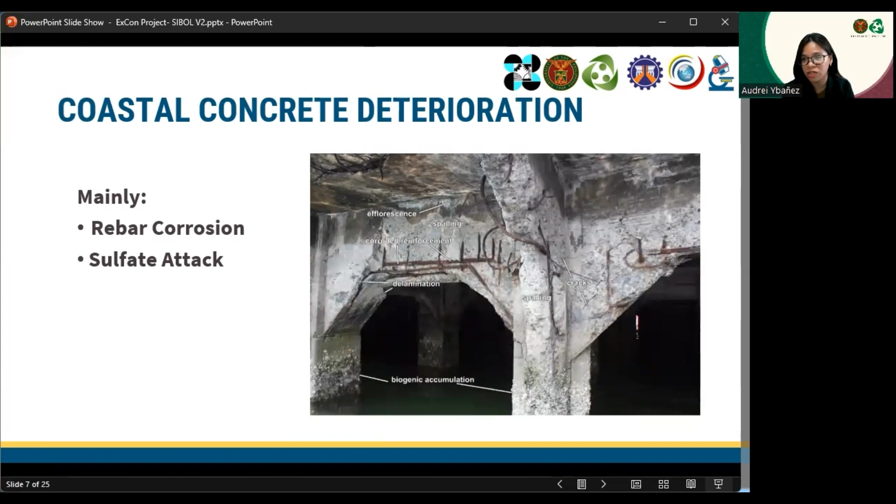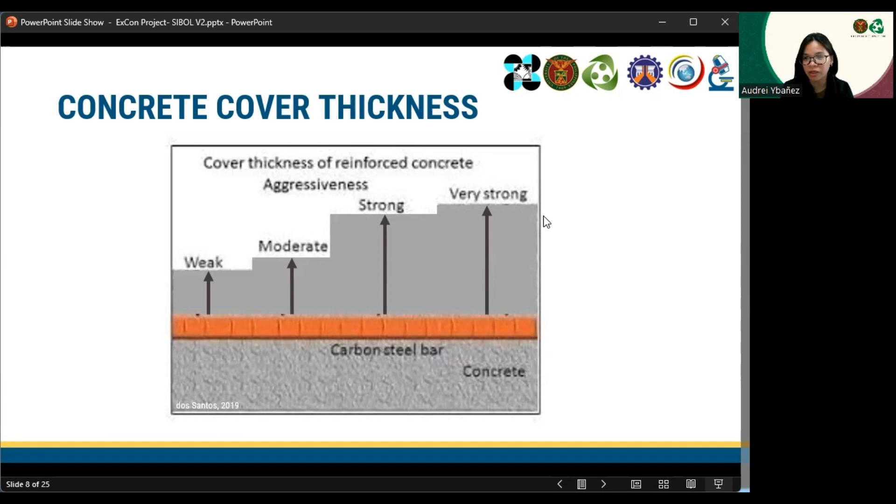A major durability problem experienced by these concretes is the corrosion of its steel reinforcement or rebar. This occurs primarily due to the infiltration of contaminants in the seawater, particularly chloride ions, and in the interaction of cement with carbon dioxide in the air, resulting in a process known as carbonation. Over time, further oxidation of the steel bars may create stress within the concrete, resulting in deterioration features such as cracks, spalling, and delamination. Structures exposed to salt water may also experience degradation due to sulfate attack. To increase the durability and prolong the service life of port structures, it is important to ensure the use of appropriate concrete cover thickness suitable to the environmental conditions structures are exposed to.

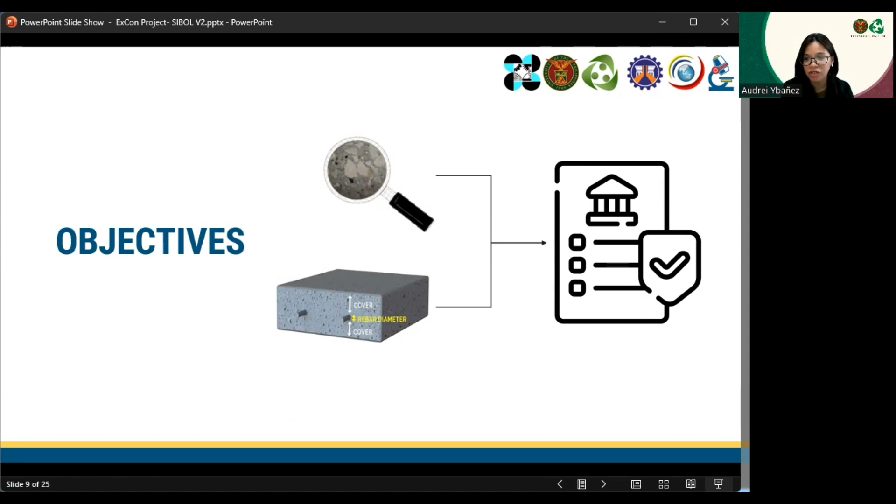Our project has two general objectives. The first is to provide a comprehensive concrete quality assessment of coastal structures exposed to extreme weather conditions. The second is to determine appropriate thickness of the concrete cover and optimize mix design for coastal structures in different Philippine microclimates. The results will then be used as an input for the development of construction standards of coastal reinforced concrete structures.

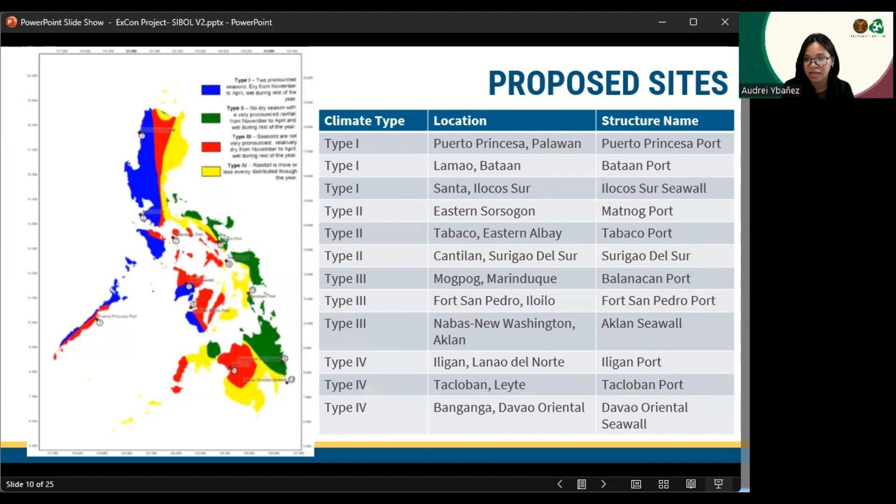The Philippines currently has 4 microclimates, and this is the main basis for choosing the sample sites. 12 sites were chosen with 3 target sites per microclimate type, 2 of which are ports and 1 seawall. Other important considerations include exposure of some sites to past extreme weather events, such as the Tacloban port for Typhoon Yolanda.

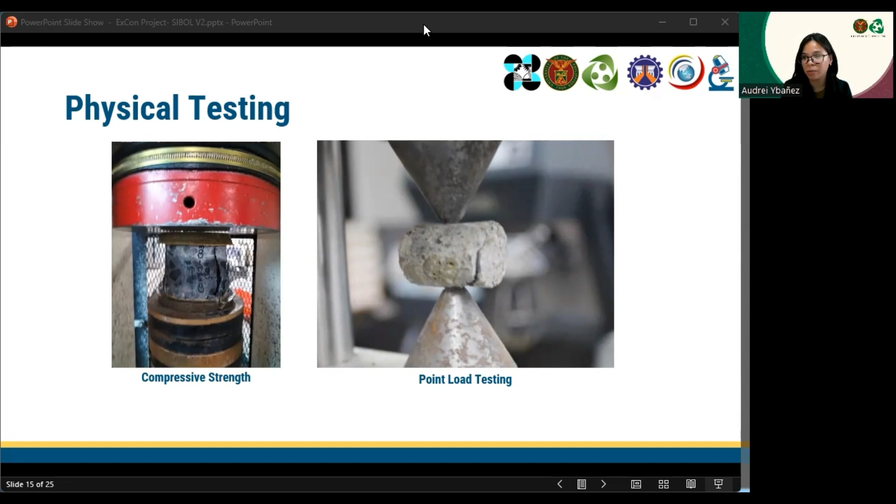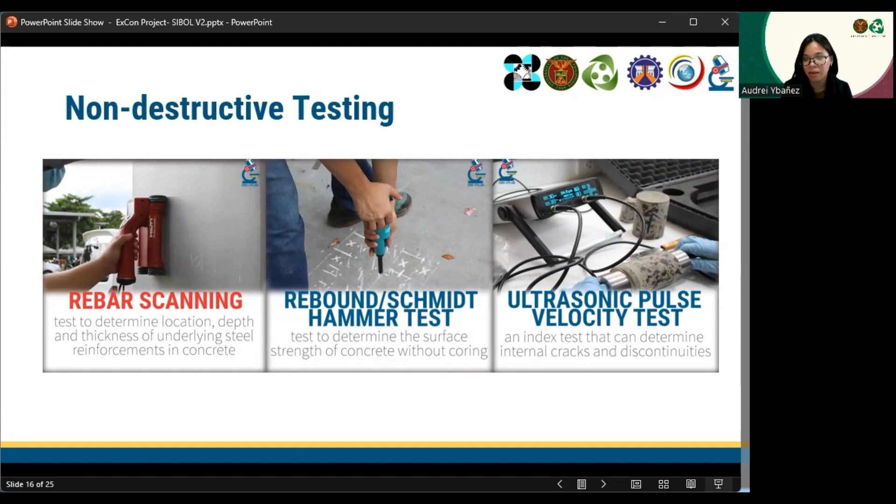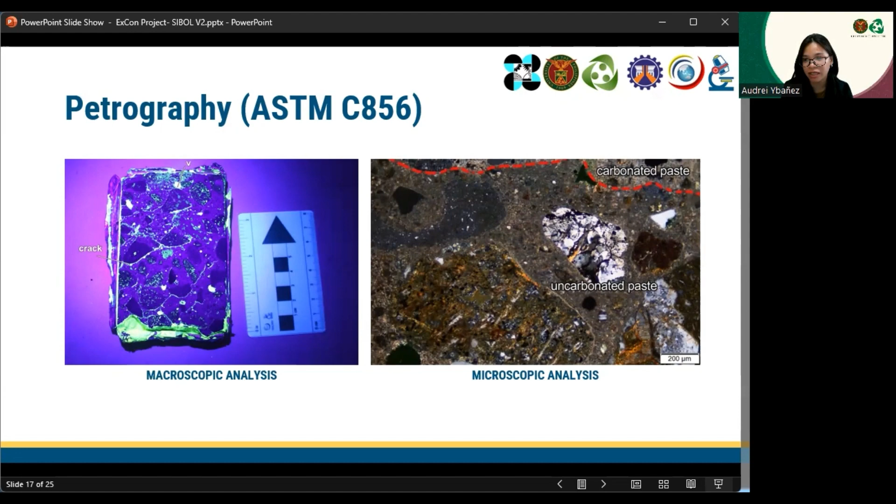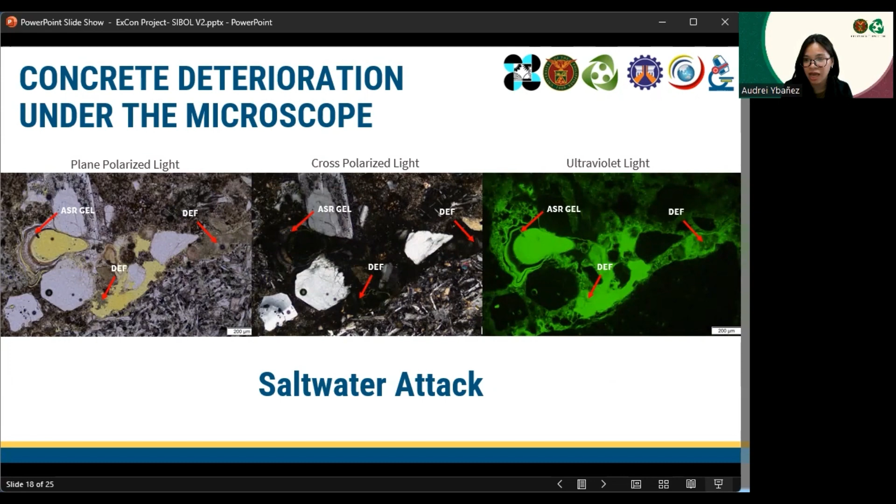Finally, concrete samples will undergo concrete petrography to determine raw material composition, water-cement ratio, air void content, and other textural properties. It will also be used to determine degree of deterioration based on observable reaction products such as ASR gel and DEF for salt water attack, as well as the determination of the extent of carbonation on a microscopic scale.

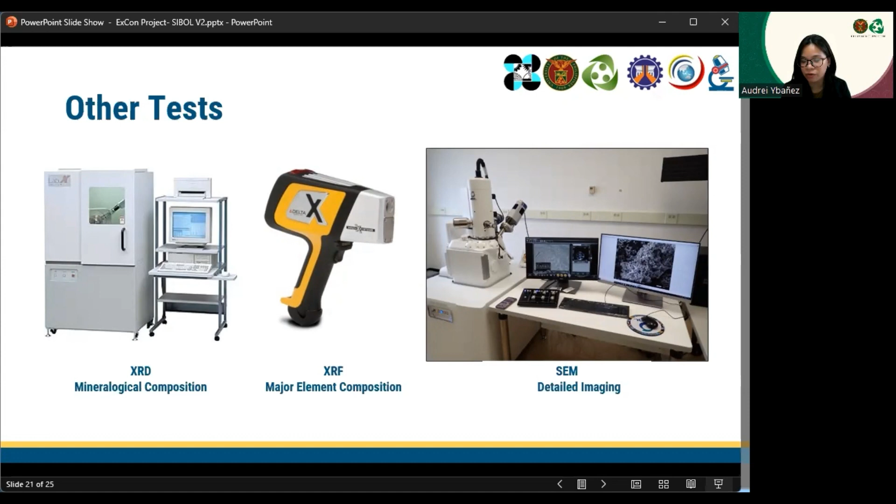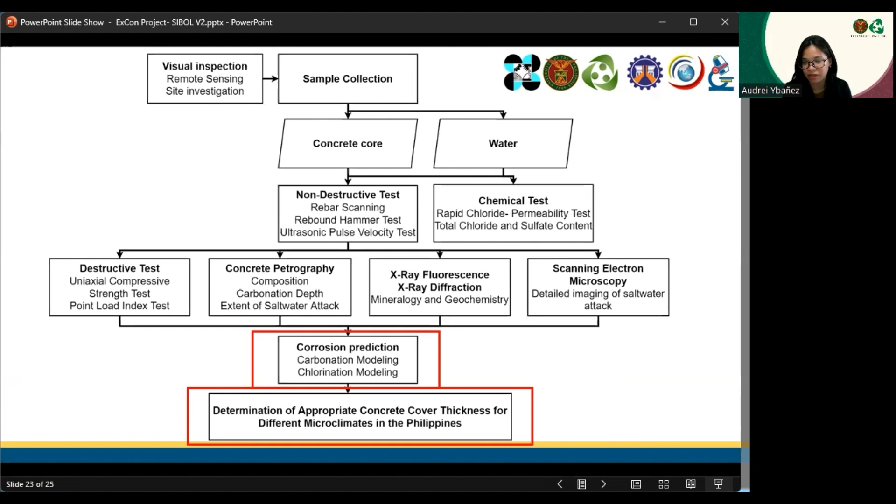Through this project, we hope to contribute to the assurance of safety in both public and private works and reduce potential expenses due to damage brought by improper testing and misdiagnosis.